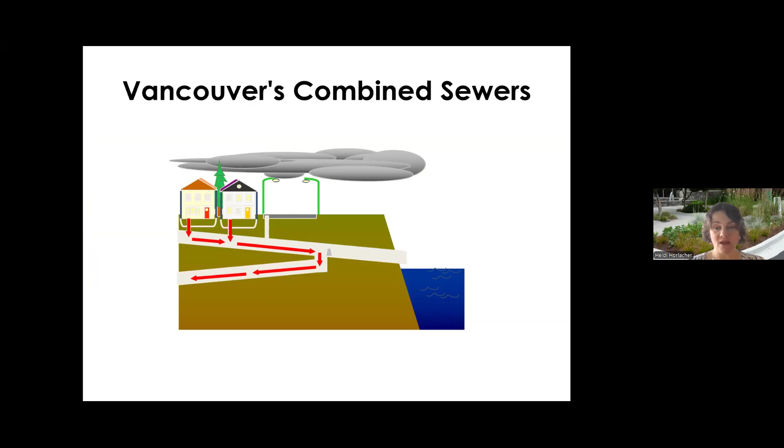One key health-related infrastructure challenge for Vancouver is that we have largely combined sewer systems. Unlike modern designs that separate sanitary and stormwater flows, Vancouver's older system directs both into a single pipe. While sanitary flows will normally reach wastewater treatment plants, when we have rainfall, that overwhelms the system. It can cause the untreated mixtures of stormwater and sewage to overflow directly into local water bodies. That's an event known as a combined sewer overflow.

So, to safeguard environmental and public health, Vancouver is actively working to eliminate CSOs, and this will help us align with regulatory requirements and enhance our local water quality.

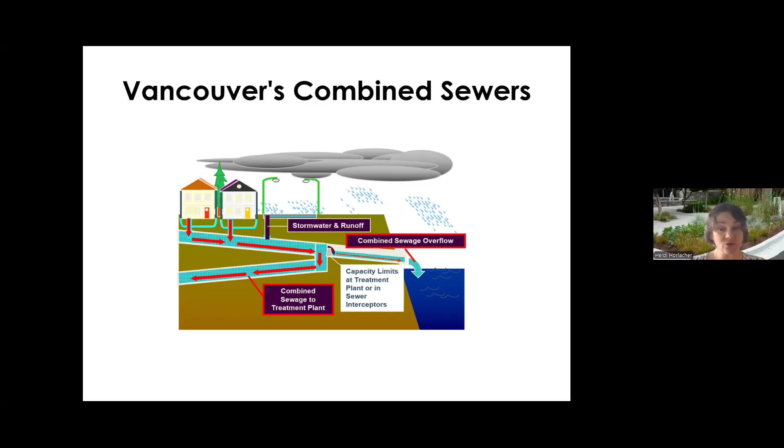Water quality issues have tangible consequences for local communities, and I'm sure in the Caribbean you're really aware of that. Periodic no swimming advisories at our beaches highlight the concern for ongoing pollution to the waters. And for decades in our region, it's been unsafe to harvest shellfish. This is more than just an environmental challenge. This represents the loss of an important cultural practice.

As I'd mentioned, we've had many local First Nations in this region, and for thousands of years, they relied on shellfish harvesting as a vital tradition, and they were deeply connected to this in their way of life. The local Tsleil-Waututh Nation, known as the people of the inlet, had a saying: 'When the tide went out, the table was set.'

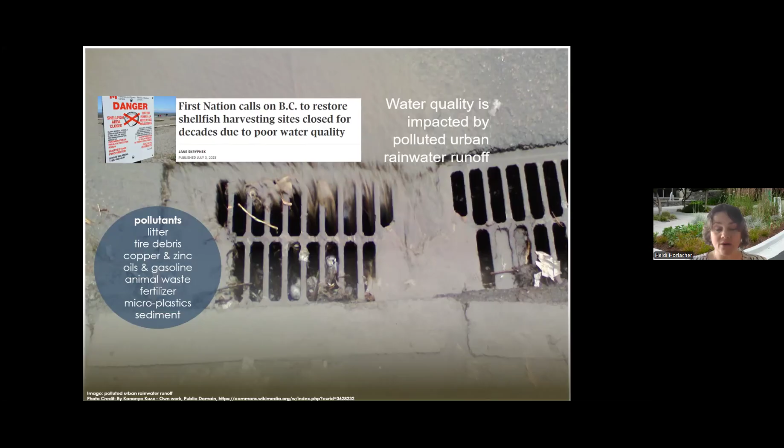So it's really important in Vancouver that we embed reconciliation with these First Nations in our work on water quality. Health outcomes for Indigenous people in Canada have been disproportionately affected by systemic racism, and this highlights the urgent need for meaningful change. For over a decade, Vancouver has been actively working to improve our cultural competencies and deepen our understanding of First Nations perspectives. We have embraced the UNDRIP from the United Nations and created our own action plan, adopted in 2022 to prioritize an integrated water management approach that would help to safeguard and enhance our local waters, which really aligns with the Indigenous stewardship values around water for our region.

So, with that context of Vancouver in mind, what exactly do we mean by green infrastructure?

At its core, green infrastructure leverages vegetation, soils, and engineered systems to mimic natural processes for managing rainwater. Beyond effective stormwater management, this approach offers a range of co-benefits. It can enhance urban resilience, improve public health, and create more vibrant and livable spaces. By integrating nature into our built urban environment, cities can foster sustainability and address these climate challenges head on.

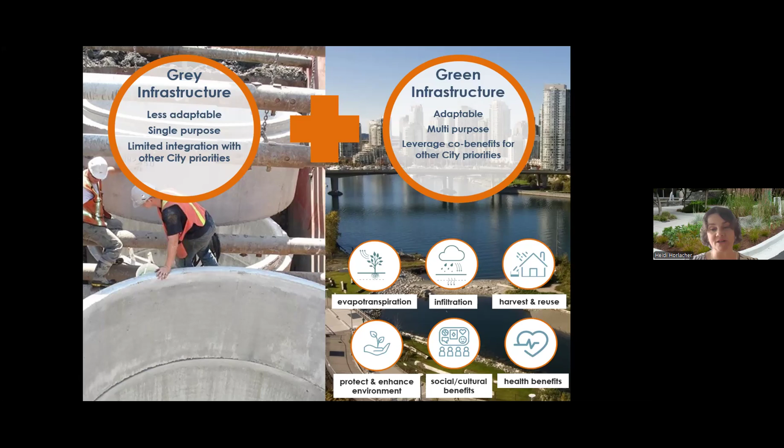Now we're expanding our approach by integrating green infrastructure to complement these traditional systems. These are surface-based solutions that create new rainwater pathways and offer greater flexibility in response to changing conditions. Beyond adaptability, green stormwater infrastructure serves multiple functions—a single investment can deliver widespread benefits. It can enhance climate resilience, improve public health, and support broader priorities while supporting natural ecosystems.

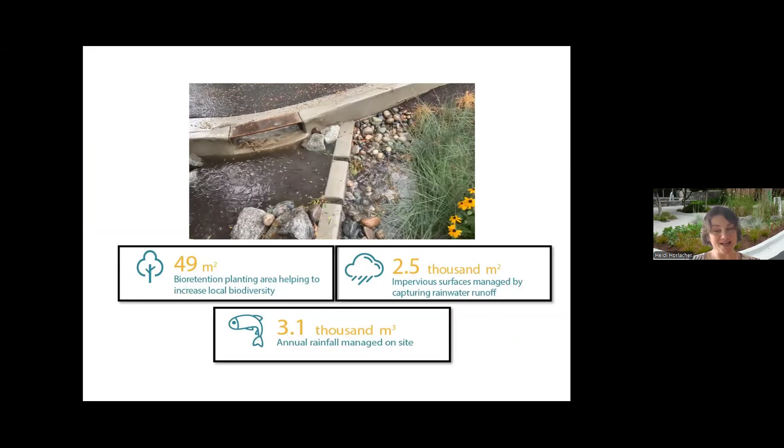Okay, hopefully you can see this little video. This is an example of what our green infrastructure does. So although we work at all scales, this is a smaller asset functioning during a moderate rainfall event.

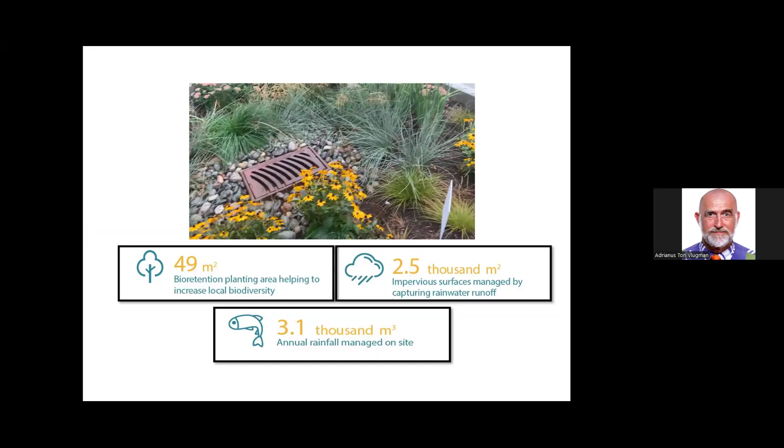We constructed this bioretention asset on an existing street when some road work had to be done, and put in 3 bioretention bulges at that time.

These features efficiently manage 3,100 cubic meters of rainfall annually, and they also create small pockets of biodiversity that enhance both ecological health and urban resilience.

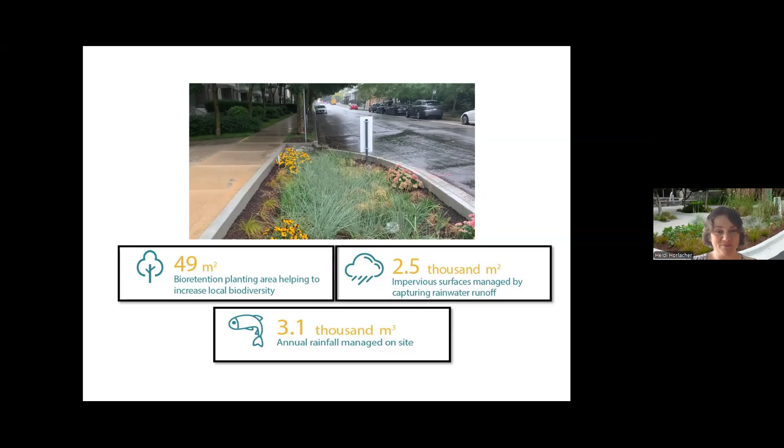And when we were building these assets, we had neighbors who would pass by quite consistently and talk about how important it was for them to be able to see the plants and the color on their walk every day.

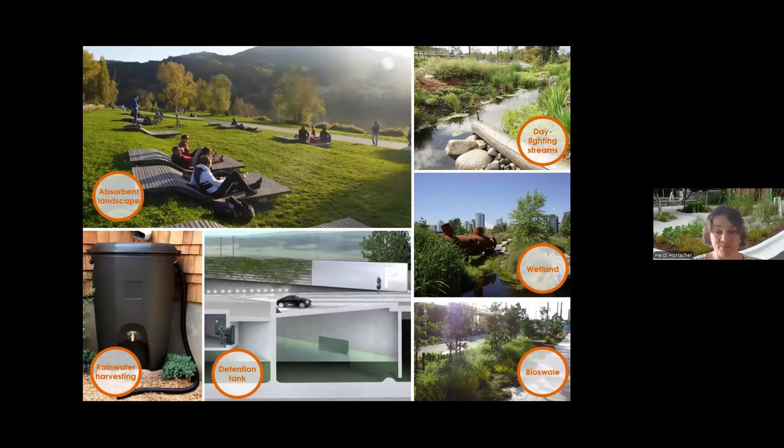As you can see, not all of them have a green expression, so they don't all have vegetated plants, vegetation, or trees. For example, those detention tanks might be installed under a large area like a playing field, and porous asphalt could be a selection for a parking lot at a shopping center, things like that.

So for areas where reducing urban heat is a priority, we would select vegetated options that can hold soil moisture—those would be prioritized.

To date, we have constructed over 400 assets in Vancouver's streets and public spaces in 5 different categories, and we've been building GI in Vancouver for over 20 years. Since the creation of our Green Infrastructure Implementation Team and adoption of the Rain City strategy, we've really ramped up our implementation rate. We've also taken the time to upgrade our design standards and put central programs in place to help protect the longevity of these systems and their success to come.

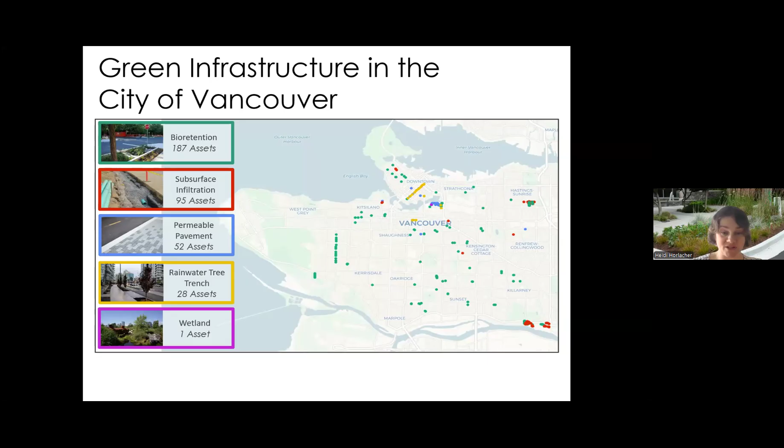So now that we've explored why Vancouver has embraced green infrastructure to build a healthier city, let's take a closer look at some of our recent projects and programs.

Our largest installation to date is a blue-green system located on 8 blocks of Richards Street in downtown Vancouver. This is a heavily urbanized environment, so there's a lot of competition for street space. The project uses rainwater tree trenches that go underneath the bike lane you can see on the left, along with permeable pavement that captures and cleans rainwater.

The systems take up a small footprint above ground, making them a good GI solution for a space-constrained area like this. Beyond the stormwater management components, this project planted 100 new street trees, offering cooling in some of the most tree-deficit areas of our city, while also shading the cyclists as they pass by.

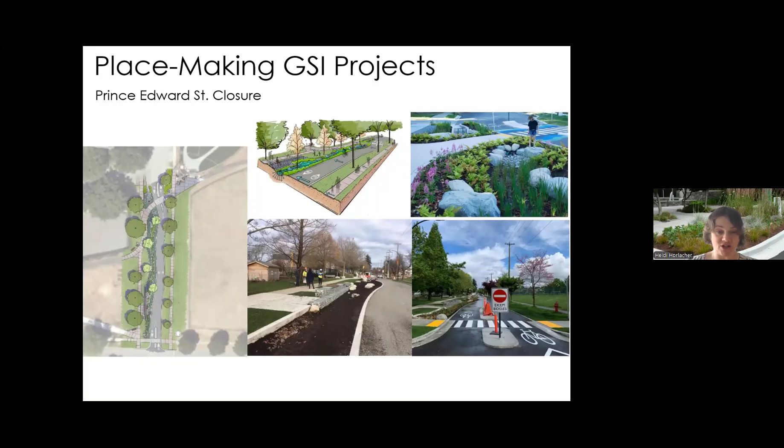Very recently, we've been completing the St. George Rainway. It has transformed 4 blocks of St. George Street into a multi-use streetscape that integrates rainwater management, vibrant public spaces, and active transportation. When it's complete, the project will filter 17,000 cubic meters of rainwater annually. That's the equivalent of 113,000 bathtubs.

It's adding 35 new street trees, which will sequester 335 kilograms of carbon per year and provide much needed urban cooling. It will introduce 1,300 square meters of native and climate adaptive plants to an area that was previously paved. This will create an ecological corridor that can support pollinators and small birds.

The St. George Rainway began in 2008, and it was driven by a group of passionate local volunteers who sought to honor a historic waterway in their Mount Pleasant neighborhood. This grassroots effort was instrumental in shaping the vision and outcome of the project.

Once completed, in addition to the services already listed, the rainway will also feature closure of 1.5 blocks to cars, expanding green space and pedestrian accessibility, along with one-way traffic in the remaining blocks, which will improve flow while maintaining vehicle access. There was also removal of parking on 3 blocks, creating room for these enhanced streetscape features.

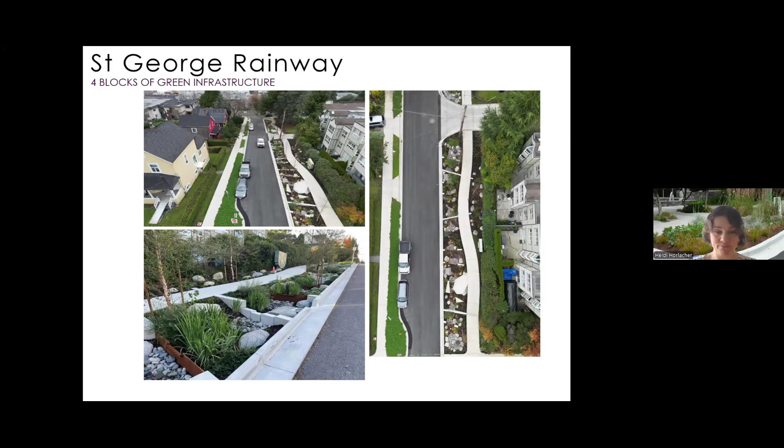Now, this is another video. Not sure if it's... oh, here, yeah, there we go. Hopefully you can see that.

At its core, the rainway is designed to provide effective rainwater management. This video captures the rainway in action during a prolonged rain event. We had an atmospheric river on October 19th, 2024, which is an event for us that means several days of steady rain, bringing volumes of rain all at once that would usually take an entire month to arrive. Something you're probably familiar with in the Caribbean, but it's a bit of a new weather pattern for our region where intermittent showers has previously been a more normal kind of rain event.

Without this infrastructure of the new rainway, much of this water could have overwhelmed the street, potentially contributing to localized flooding. Instead, you can see in the video that a nature-based solution here is helping us adapt to these new extreme weather events.

The engineers really liked seeing the laminar flow going over the weir.

As I mentioned, engagement was an important part of things. Education is key to achieving widespread adoption of green infrastructure. Many people are unaware of both the challenges that GI addresses and the benefits it can provide. It's important to emphasize that these are not just pretty natural spaces, they're critical drainage infrastructure, and they support climate adaptation and urban resilience.

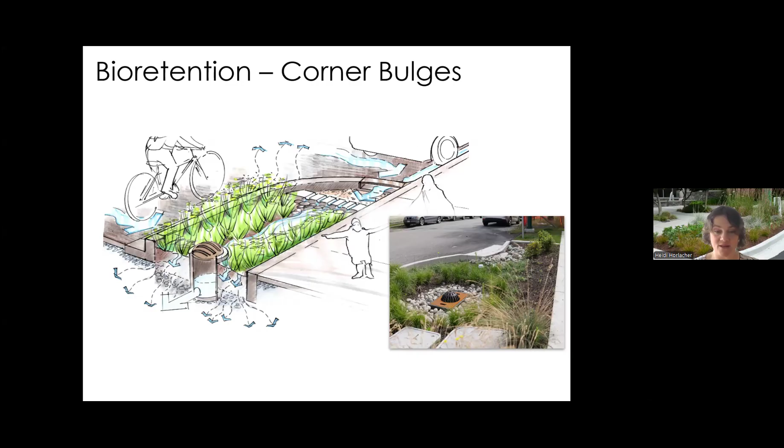By upgrading these spaces, we're going beyond just a transportation service to include stormwater management, urban cooling, and improved aesthetics. For those on the call interested in exploring design strategies, we have resources on our website that can help you look at how to design and standardize these assets.

In collaboration with our urban forestry department, our branch is helping to mitigate urban heat by supporting the health of new street trees in a light industrial area of Terminal Avenue, where there is little green space. To enhance resilience, we've used soil cells and tree pits, as you can see on the left. This helps ensure that trees in this area will now have access to adequate soil volume and water retention, which will really help them survive and thrive.

This initiative directly responded to the recommendations from the BC coroner that followed the 2021 heat dome, reinforcing the need for cities to urgently take on cooling strategies for vulnerable urban areas.

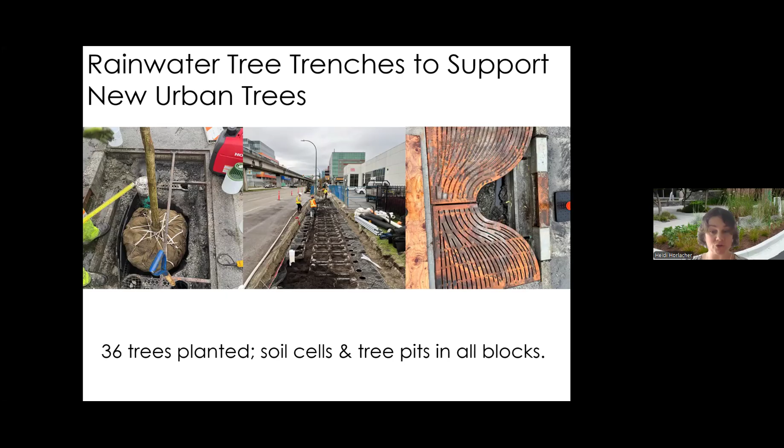I mentioned young people in part of our outreach materials. Yes, we actively seek opportunities to build community partnerships around green infrastructure. One recent success was the completion of a new park called Gibby's Field, a couple of lots in a neighborhood in East Vancouver that now exist as a newly naturalized park.

Their contributions included helping to seed Gibby's Field at the park opening and creating stencil artwork during a public engagement event. These kinds of nature-based connections foster physical and mental well-being for children, who also bring that excitement and enthusiasm back to their own families.

Various grants are available to help support these kinds of learning experiences here in Canada. We were able to expand community participation and environmental education in that way.

It was also easier for us to have help from our local health authorities, who could provide letters of support for funding applications such as this. These kinds of things helped strengthen our proposals and reinforce the idea that there are broader health benefits available from these initiatives.

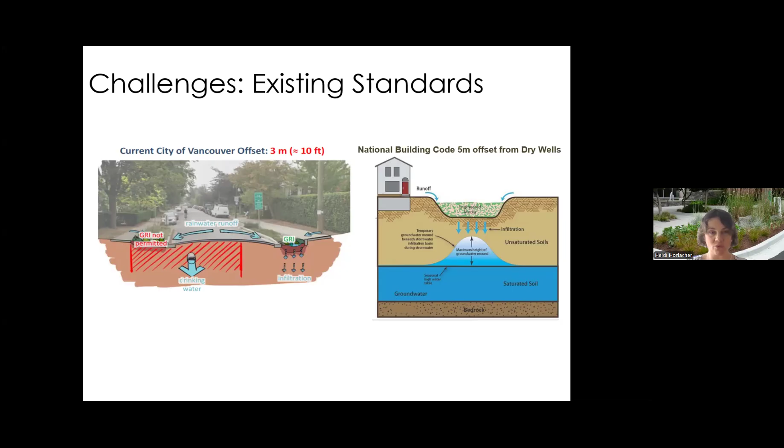I just wanted to highlight a few main takeaways to leave you with. The first is that how we design our cities affects our well-being more than we probably previously accounted for. The city around us really affects how we feel and what health outcomes we have.

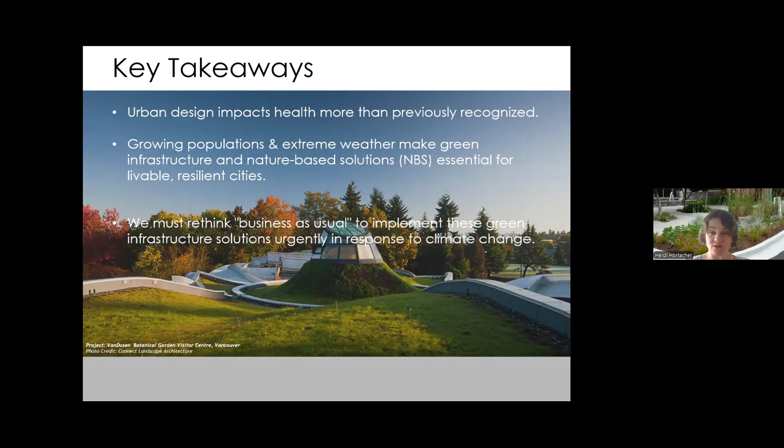The current and future challenges with increased populations and extreme weather events are going to make it more important than ever to invest in nature in our cities and make them more livable and resilient. There are definitely evidence-based actions that lead to better health by using and embracing nature-based solutions in our cities. So we have to revisit business as usual so we can implement them urgently to respond to the climate change that is here.

With that, I would like to say thank you for your attention, and I would be happy to take questions.